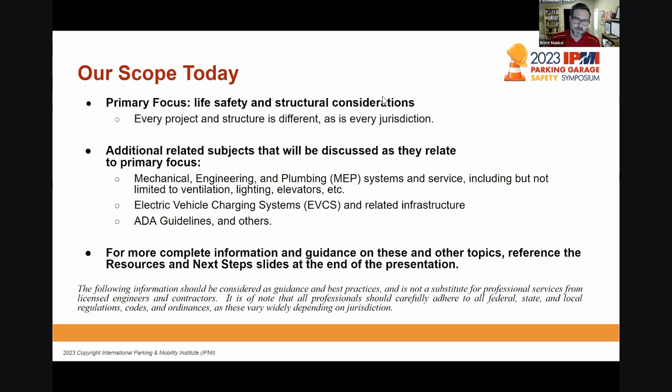So the scope, the initial focus, we're going to be looking at life safety and structural considerations. So obviously just looking at the design criteria. Then we're going to dive into a little bit about MEP, EVs, and how they relate to existing design, new design, ADA guidelines, etc. And we do have an appendix that will be shared. So the resources, you don't need to take great notes, because we're going to share what we have here, as well as

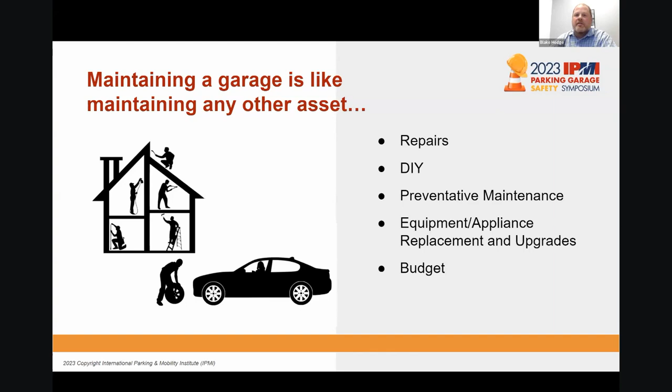And then finally, there's some things that you want to do. And so certainly in your home and in your car, there's some things that you want to do to maintain it, keep it going. And in that same vein, as you begin to think of parking as an asset, it's good to think about what you have to do, what you should do, and what you want to do. So if you keep those 3 questions in your mind as we go through the presentation, I think it'll be helpful and sort of layer in a flavor of understanding of the topics we're trying to convey.

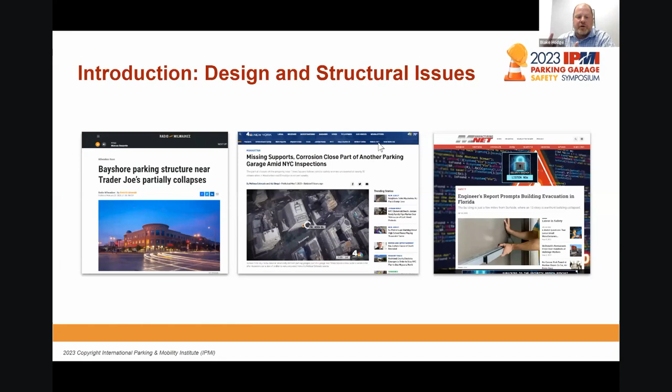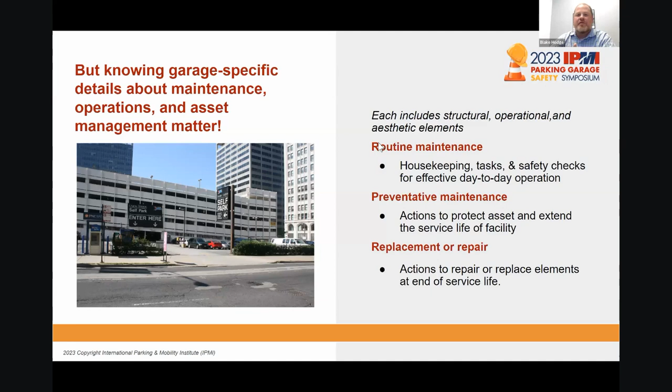And so with that, maybe next slide, Rachel. So we talked about things that you have to do, things that you should do, and things that you want to do. And we all know that there's some environmental factors associated with those, things from the elements, things of where you are, but there's also factors outside the environment. There's drivers, there's people that do damage to our facilities, and we need to understand and plan for those as well.

So when we begin to talk about how do we plan for these items, both the unknown and the known that we can plan for, just an idea of having one, budget set aside for these items, and two, a consultant, either through an on-call or a go-to consultant that you can interact with to address these issues. So with that, I'm going to turn it over to my partner to get in a little bit more details on the fundamentals of the design of the facilities we're talking about.

Sure, thanks, Blake. No, I love some of those photos. You never know. The structure is easy to deal with compared to the human factor.

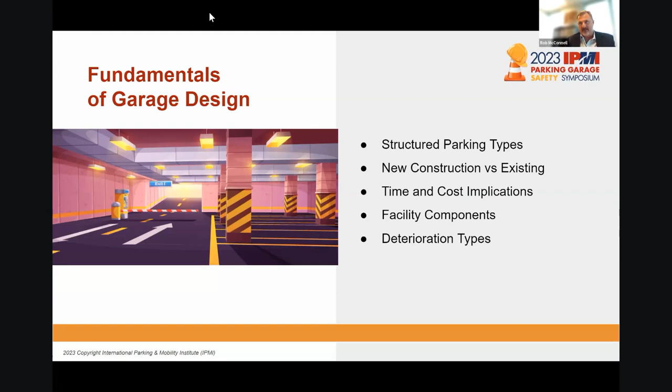I'm going to review a few topics here, and at least at the outset here, I'm going to try to digest all of structural engineering, durability design, maintenance, and everything, and distill it down into about 7 slides here. So bear with me as I run through these and understand there's a lot more depth to this. But starting off, if you want to roll it one forward.

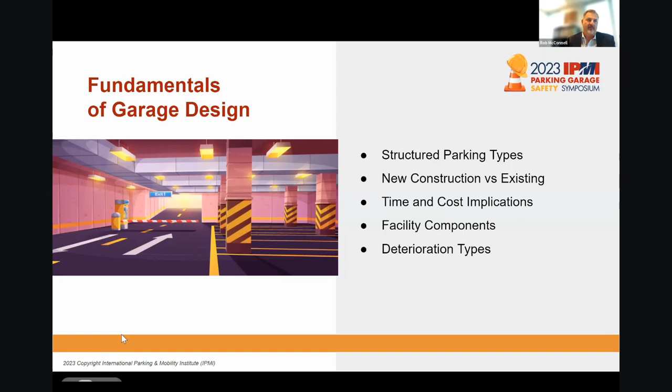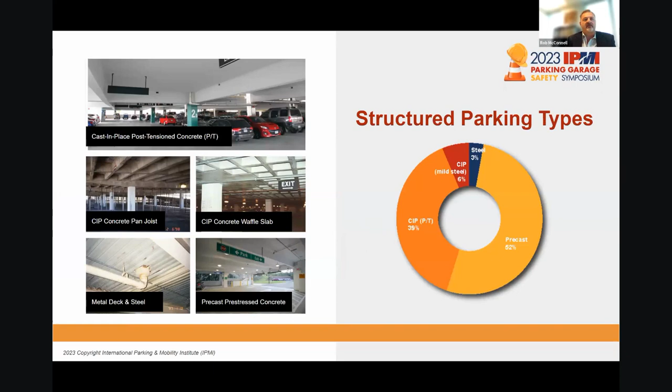I'm going to talk briefly about the different types of structures here. Got a few images on the left there of different types of structures. The top one is a cast-in-place post-tension concrete facility, and directly below it, you've got a couple different variations on conventionally reinforced, in other words, non-pre-stressed structures that are concrete, precast, pre-stressed, which is probably your most common type of structures, the bottom right corner. And then occasionally you see steel, either with or without metal deck. A lot of times in the Pacific Northwest, you'll see more steel structures perhaps than you will elsewhere.

And each one of these structures, number one, there's concrete in all of them because concrete is typically the driving surface. I can't think if I've ever seen a structure that didn't have a concrete floor in it. So you have to deal with concrete and all its strengths and its weaknesses. And each type of structure has its pros and cons. Dealing with each, you're going to have to address each a little differently.

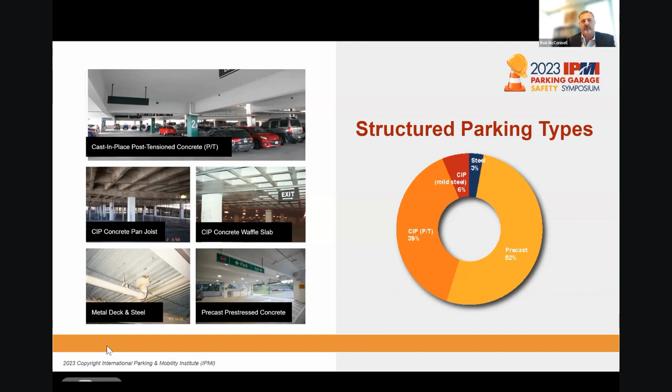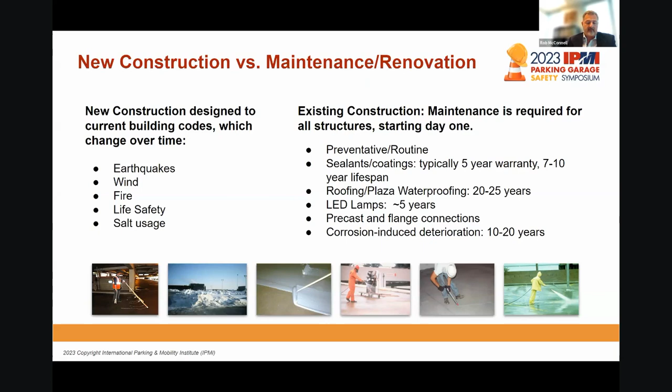And just as I mentioned previously, precast is probably the most prevalent, but by far and away, precast and cast-in-place post-tension make up the vast majority of structures out there. So understand what kind of structure you have. That's the first step. Second thing to consider is new construction versus existing construction and the maintenance associated with that. Typically speaking, new construction is going to be designed using the latest design techniques and the latest building codes.

Codes change over time, and structural design to a certain extent becomes obsolete. Although buildings don't fall down after the codes change, generally speaking. But for example, earthquakes: before the early 1990s, outside of the West Coast, very few places in the United States designed for earthquake loads. The wind codes just changed recently, and now they're more strenuous.

Fire: those of you who have new structures or are planning new structures may be aware that in the 2021 version of the International Building Code, there's now a requirement that any structure over 48,000 square feet have fire sprinkling, regardless of whether it's open or not, and that's coming out of a couple pretty nasty fires in Europe. Life safety requirements change. Salt usage in the early 70s ramped up to something like 10 times what it had been in the 1950s. So things change.

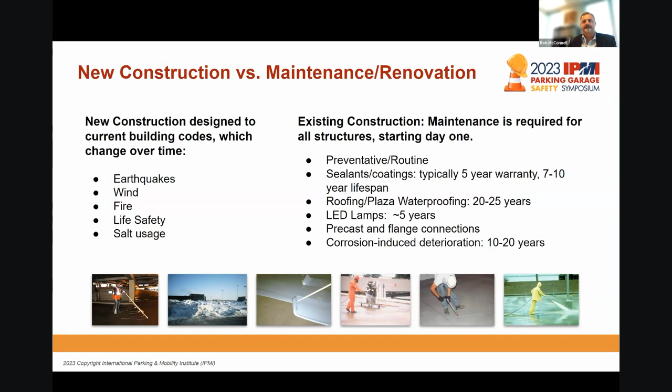But this type of exposure to salts in particular and moisture in particular is not just limited to the upper Midwest and the Northeast and the mountain states. On the coasts, you have airborne salts coming off the water, and the corrosion zone, the durability zone that ACI suggests for structures within about a half a mile of the water is the same as it does for the upper Midwest and the northeastern United States. Just that volume of salt.

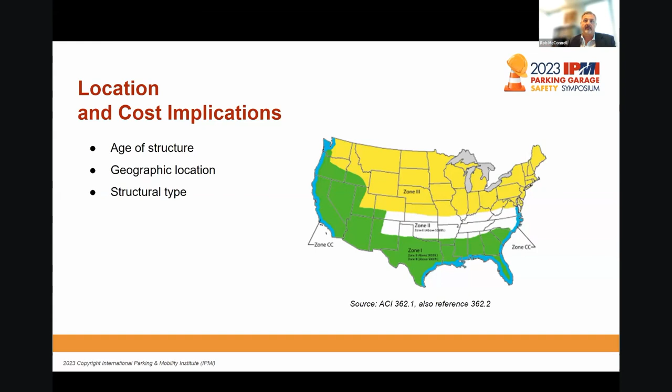So your maintenance and requirements and whatnot are going to be dependent not only on where you are and how much salt usage, but what type of system you have, whether the concrete is pre-stressed or not. In other words, pre-compressed, which will help limit cracking. Conventionally reinforced concrete is going to crack just as a part of its performance. And I showed you a picture of a metal pan system, stay-in-place metal deck. Those are notorious for trapping moisture between the bottom of the concrete slab and the pan, and so that freezes and thaws and rusts, and that has all sorts of other problems as well.

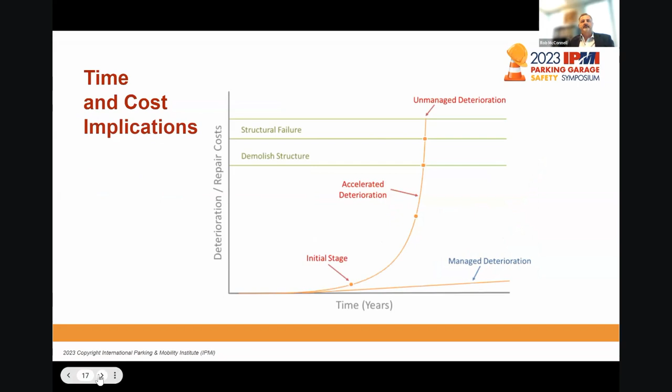This is a curve, and don't worry too much about what the units are. What it's intended to illustrate is that the longer you put off a repair, regardless of what that repair is, the more rapidly it's going to accelerate, and at some point it's going to get to a level where it's not manageable. And that is absolutely true for concrete deterioration. And then you've got the straight line along the bottom there that says, if you manage the deterioration, it's a process and a known quantity. If you stay on top of it, it doesn't get out of control.

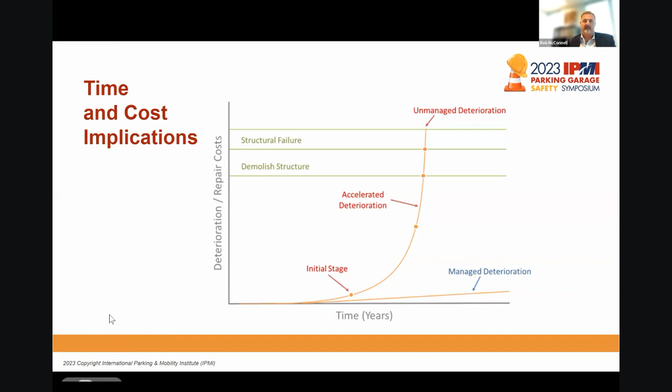Here's an example. Mark said it looks a little bit like snakes and ladders, but it hopefully is an effective graphic here. An example would be a leaking crack or a leaking joint. If you noticed in a garage that you had a leaking crack or a leaking joint, your inclination might be to say, well, that's just one spot, I'll catch that next time around, when we replace the sealants in a couple years. Well, to replace that sealant, it might cost you $5 a linear foot. If there's not much of it, it might even be as much as $10 a linear foot, but it's peanuts compared to what you're going to have to deal with if that joint continues to leak and lets salts and moisture into the crack and causes the embedded rebar to rust.

And when the rust expands, it causes delamination. We're going to talk a little bit and show you some pictures a little bit later about that. But to fix a delamination is going to run you somewhere in that $50 to $100 a square foot range. So you're talking orders of magnitude above that $5 linear foot repair. And then if you just let it go and you say, well, I'll catch that next time, it gets more and more expensive, and eventually you get to the point where portions of your garage or maybe the whole garage becomes unserviceable and unusable. And you lose not only the money it takes to fix that, at such time you decide to fix it, but also whatever sort of revenue you might be taking in for being able to use that part of the asset.

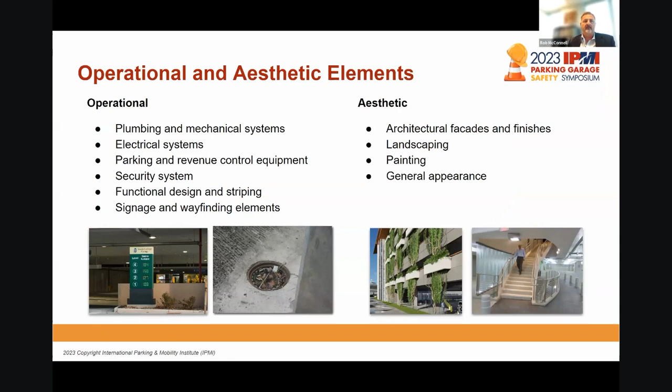And one more thing here, maintenance is not just about the structural piece of a parking structure project. All of the garage's systems need review and TLC over the course of the life of the garage. These include plumbing systems and electrical and lighting and the parking access and revenue and parking guidance systems and security systems and so on.

And then in addition to that, you want to keep up the aesthetic features of it. People need to be comfortable, need to feel safe and secure in a garage. And part of that is keeping your finishes up and keeping things clean and nice and well lit, and keeping the general appearance of the facility such that you're attracting customers.

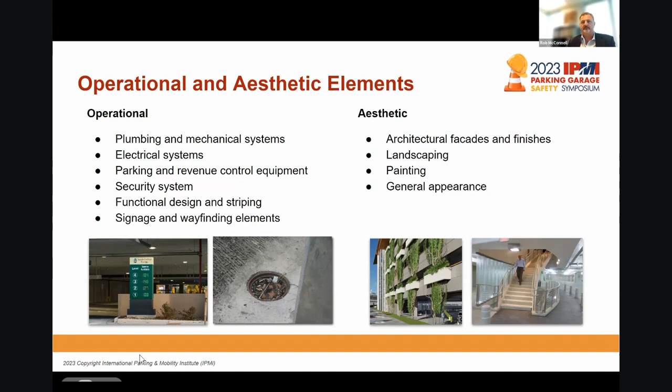I'm going to turn it over to Mark. Mark's going to talk a little bit about some other stuff here.

Great. Thanks, Rob. So in addition to some of the structural information Rob went over, along with those operational and aesthetic components, I want to do a bit of a deeper dive and talk about the overall facility components. As you can see there in the bullets, we're going to chat about functional design, signage and PARCS, stairs and elevators, and we'll dive into MEP towards the end of that particular program.

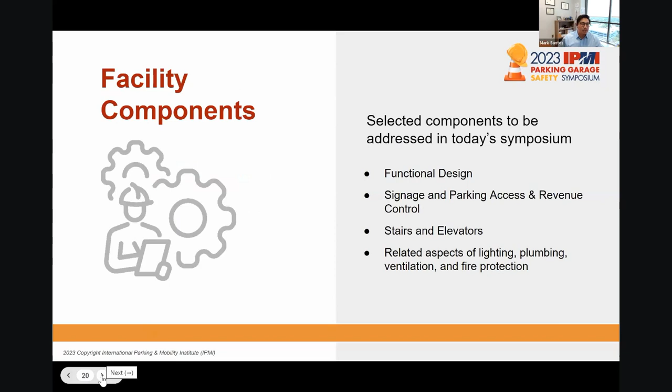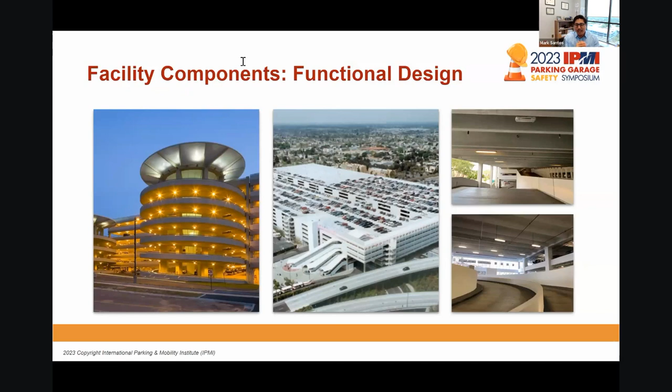So with functional design, I'm sure we have a lot of examples of good functional design and maybe others that need some improvement. But the whole idea with designing parking garages and facilities and mixed use types, the goal is to have efficient layouts, streamlined vehicular flow and, of course, comfortable maneuvers. And how we wrap that up as an industry is how we label that term as functional design.

Some key design aspects, as you can probably relate from your facilities: where are the entry exit locations? Is there one-way flow versus two-way? What are the types of users? Are they parking all day, or is there a lot of turnover and transactions? How are the ramps oriented? Are they in the right spot, and are there more than one?

So while those areas are pretty important to functional design, we also cannot forget about trying to minimize cross traffic within the facility, trying to minimize pedestrian conflicts with any types of vehicles, and also properly locating and placing stairs and elevators to where most folks are at their point of destination. Next slide, Rachel.

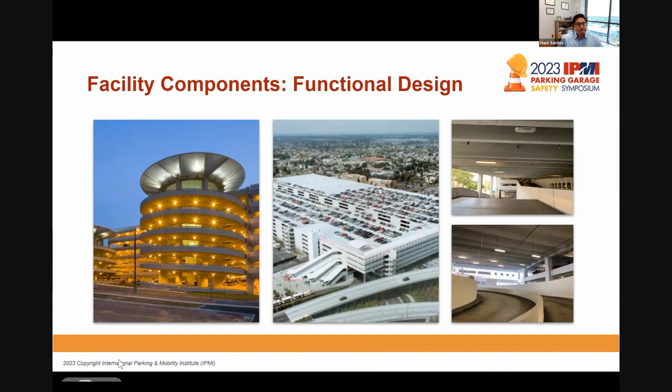Probably one of the most visible pieces for your patrons that they typically see upon arrival are your signage and any type of parking access and revenue control. So from a signage standpoint, sometimes there could be too much signage. So what is that balance between quantity and content?

As we talk about these areas with your facilities, how do they relate to what you see day in and day out? Are your signage messages clear and concise, or maybe there's too much information? Are they placed in the proper location to allow patrons to really understand what they need to know at the proper time? These are just a few examples you can see here when you analyze your own facilities.

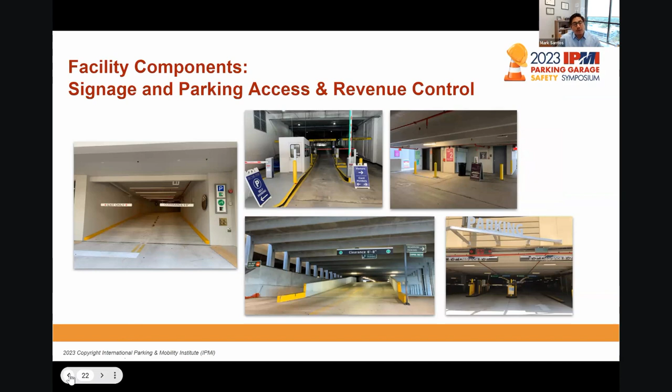From a parking equipment standpoint, many owners are interested in whether it's asset light or less equipment. But at the end of the day, most owners are looking for something to be more convenient for their patrons. Maybe it's the right time for upgrades, or maybe it's the right time to consider upgrades.

But what we typically talk about as well from our standpoint is, what are the viewpoints and the benefits from the user standpoint, of course, but also from the owner side, the operator side. Are there any advantages with enforcement or available data? Those kind of questions that come to mind.

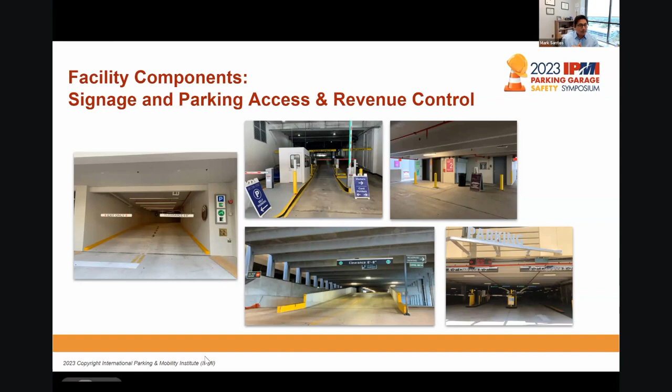The third piece is really talking about vertical circulation, or stairs and elevators. Obviously we're very familiar with what these are. They provide not only the vertical circulation between levels, but they are a part of your life safety system for egress. In the event of an emergency, your stairs are part of that life safety component, whether it's your guardrails providing fall protection for your patrons,

or minimizing the conflicts between vehicles and pedestrians. Again, you can see a lot of the bollards in these particular photos providing that level of protection.

A few other things to consider with your stairs and elevators: there's typically maybe one or two that are more prominently used than others. And sometimes it could be easy to forget about some of those egress stairs that are really only going to be used for emergency type conditions, and we definitely want to make sure that patrons are safe, minimizing any tripping hazards, things of that nature, to ensure full safe components, not just in the parking areas, but also in the stairs and elevators.

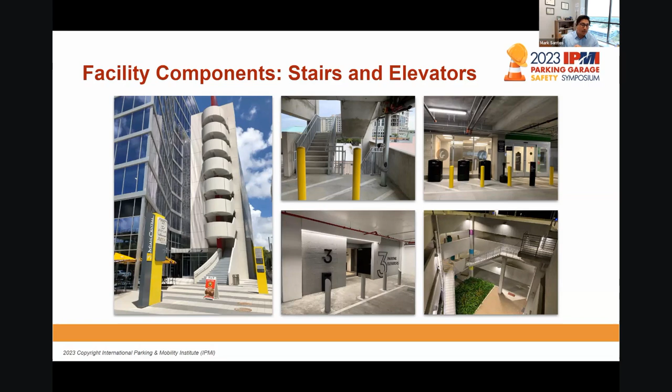And lastly here is more of a helping with the overall performance of the parking structure itself. We could spend a lot of time talking about MEP, and I know we're gonna have a little discussion. I think we're getting some questions about what are the impacts of EV and those loads, and we'll kind of chat about that towards the end, because I know that's definitely on folks' minds.

But as far as your typical MEP or mechanical, electrical, and plumbing systems, obviously your lighting systems are super important to provide a safe and secure environment. Are there areas of your parking garage that are painted, as you can see in some of the examples, to help provide some more increased visibility and increased lighting levels?

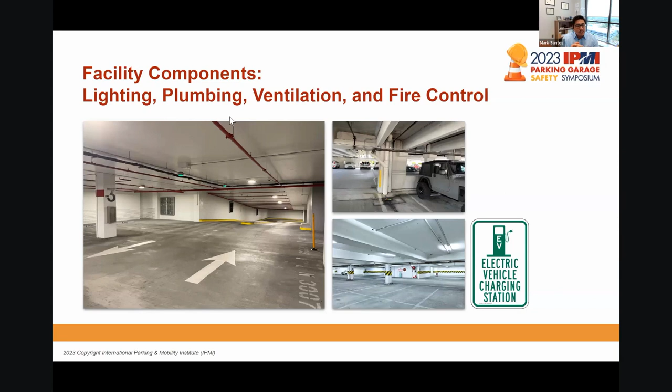The picture at the top right, while it's kind of out of sight, out of mind, and I'm talking about the plumbing and drainage system, unless there's an issue. So making sure that your drainage system is clean, so there is not ponding water and things that could then lead to leaks in other locations. As Blake and Rob tried to mention, it's really trying to stay ahead for the most part of some of these systems.

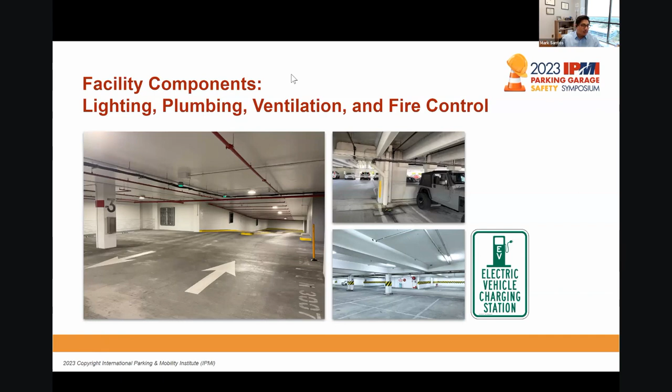And then also fire suppression, as Rob mentioned, that's definitely something that I think a lot of us are in tune with, but as the codes change, it's going to be more prominent in having sprinkler systems, and what does that really mean, not just from a cost standpoint, but from a maintenance standpoint as well. So that kind of wraps up more of the support systems. I'll turn it back over to Rob to a little deeper dive on specifics of maintenance and restoration.

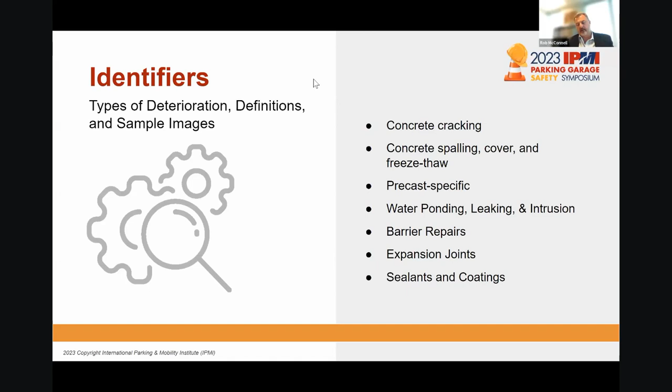Sure. So what I want to do is run through some pretty typical types of deterioration that you might see in a parking facility. And granted, some of these pictures are a little bit on the more extreme end, but they are characteristic of what you might see. That way, as you're walking through a garage and doing your in-house review, you could train your staff to kind of keep these things in mind.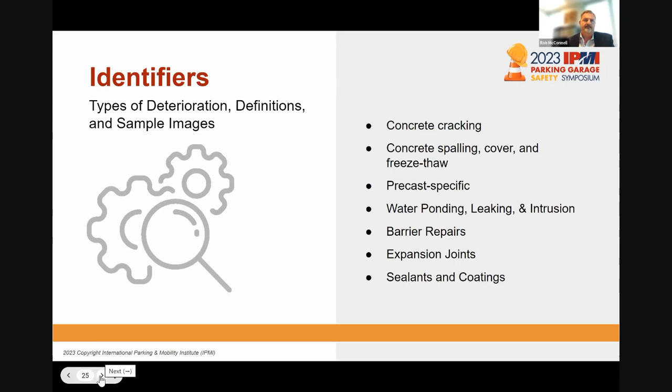And if you see something that looks problematic, maybe you can relate it to some of these images, and I'll also try to give a sense of at what point these indicate a really significant problem versus maybe a serviceability problem or an aesthetic problem. So the first is concrete cracking. All concrete cracks. That's part of the way it's designed. Some cracking is worse than others.

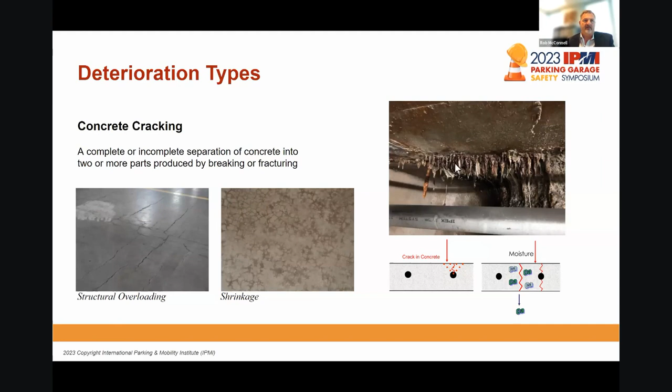The image on the left there is actually cracks due to overloading. In this particular facility, they were driving loaded forklifts in the garage, and it literally broke the floor. So we had to strengthen the floor to address those, and then deal with the waterproofing aspect of the cracks.

The image in the middle is typical of what you might see for plastic shrinkage cracking or possibly drying shrinkage cracking. That's usually indicative of, during the curing process for the concrete, the moisture in the very top of the slab evaporating too quickly, and the very top layer of the concrete drying out and cracking before the rest of the slab is cured out.

Compared to the structural cracks on the left, the shrinkage cracks are very shallow, and typically they're not structural, although they do need to be addressed because over time it can lead to deterioration of the top surface. The image on the right there, that's kind of the extreme condition of leaking cracks. Those cracks have been leaking for decades and nobody's done anything about them, and you can see stalactites forming.

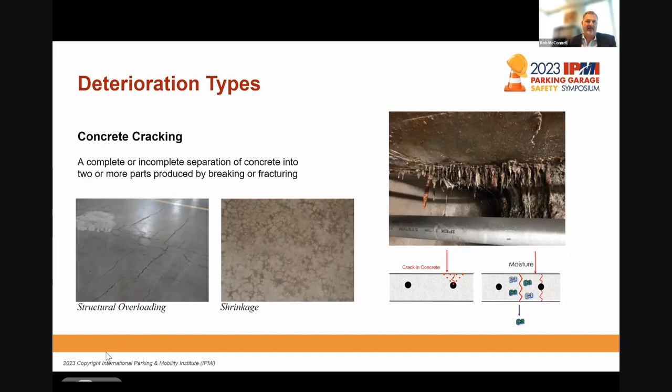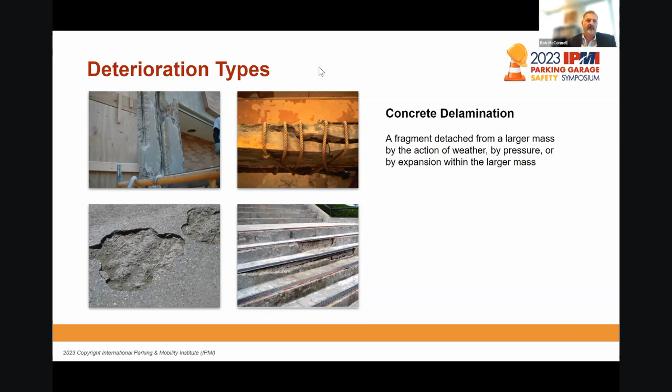So when you get leaking cracks and moisture in concrete, you get corrosion, and the corrosion product is rust, and rust has significantly more volume than the steel itself. So when the rust forms, it creates an outward pressure on the concrete, and concrete's great in compression. It's not good in tension. It can take about 10% of the stress in tension that it can in compression. So when you get that outward pressure, it pops the concrete off.

And in every one of these images, with the exception of the famous rope repair up there in the top right, you can see exposed rebar that is rusted and caused that concrete to spall off. Spalling is another word for concrete delamination. The rope repair is an extreme example of somebody deferring maintenance, not wanting to spend the money to actually repair something in the proper fashion.

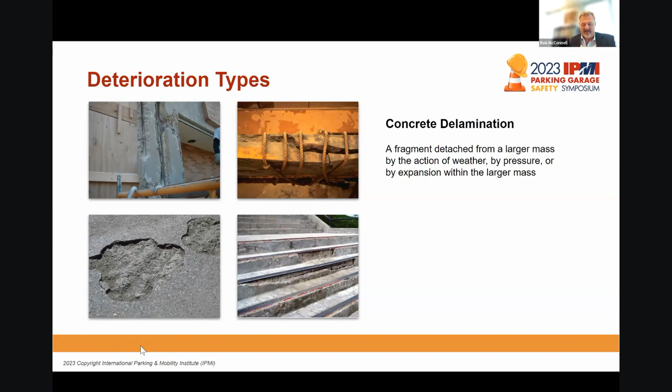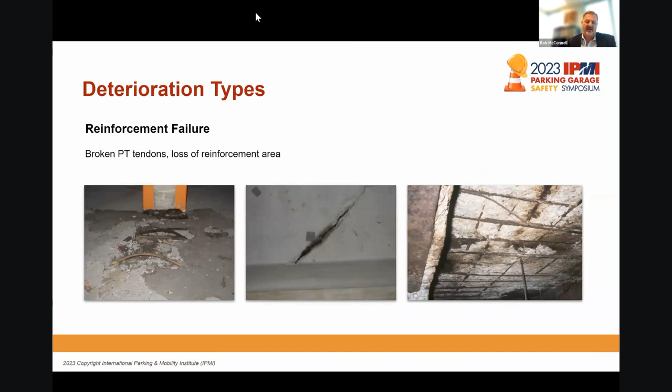The next slide: when steel rusts, not only does it cause the concrete to delaminate, it also causes you to lose the steel itself. The cross section of the steel gets reduced every time you generate more rust, and sooner or later you lose the ability of that steel to support anything. Or in the case of post-tensioning tendons, like you see in the image on the left, you start losing.

These are 7-wire strands. Typically, you lose a wire. Maybe it doesn't do anything. You lose another wire, and all of a sudden, the remaining 5 or 4 wires don't have the capacity to hold that pre-stressing load, and they break and explode up out of the slab. And that's what you're seeing, the multiple broken tendons there from corrosion somewhere out away from this point, where enough of the wires in the strand rusted to where the rest of the tendon couldn't support them,

and it caused a failure there. The image in the middle, what looks like grease coming out of a crack, that's exactly what it is. It's grease from a post-tensioning tendon that has failed and ruptured. The post-tensioning tendons typically have sheathing around them. Some of the older ones are paper wrapped, and some of the really old ones don't have anything.

But most of the tendons that have been put in the last 30-35 years have a polypropylene sheathing on it, and it's got a grease in that sheathing to keep the moisture out. And if something happens to the sheathing, it gets compromised. If the tendon fails somehow and ruptures the sheathing, then you can get leaking grease, and that's an indication that you've got a structural problem.

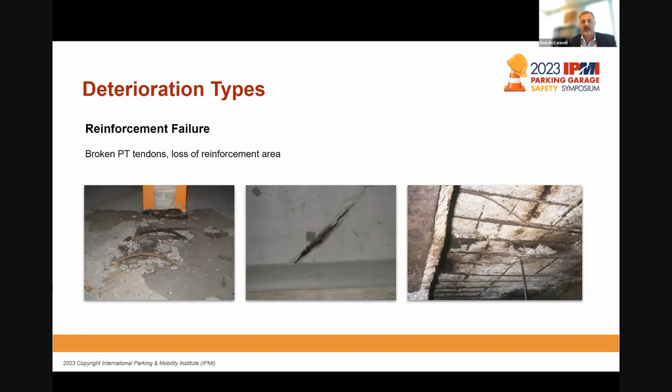Another type of deterioration that you see, particularly in the northern climes where you get lots of freeze-thaw cycles, is scaling. What causes this is moisture gets down into the top layer of the concrete, and if you remember your elementary school science experiments, when water freezes, it expands. And if the concrete doesn't have air bubbles in it, air entrainment, or if when they finished the concrete they really brought the paste up and overworked the top layer, it probably took all the air out of it.

And so when that moisture goes down into the concrete, because it will penetrate concrete, it's got a bunch of capillaries in it, it's like a hard sponge. When that moisture gets down in there and freezes, it doesn't have anywhere to go. There's no air bubbles for it to go into. And so it's similar to what happens when the steel rusts: it puts this outward pressure and just breaks the top level of the concrete off.

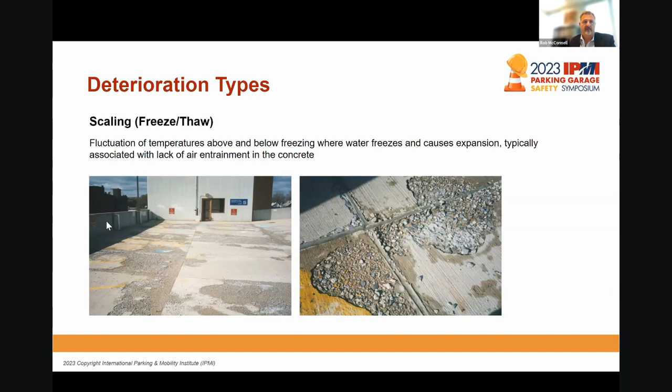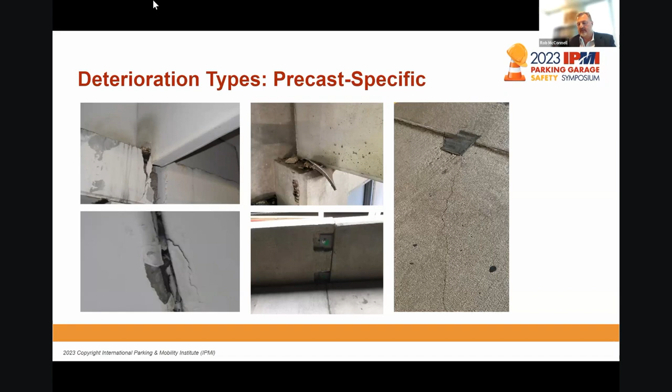That bearing pad has walked off the ledge, probably due to the cyclical nature of the volume change. Garages are pretty dynamic animals. They expand when it gets hot and they shrink when it gets cold, and they're always moving. Most of them expand and contract somewhere in the order of about an inch or so each way a year. So as that happens, things move. Also, precast structures tend to be a little bouncy, and as the cars drive over it, that movement can cause those bearing pads to walk out.

The image on the right and the image on the bottom left are somewhat related. Those are double T flange connections, and different types of failures associated with that. Again, caused by movement, up and down movement, volume change movement, and water and rusting over time, and they will break and sometimes cause the concrete around it to crack and spall. The pre-topped decks, the decks that have factory installed topping versus field cast-in-place concrete topping, tend to be more vulnerable to this than others.

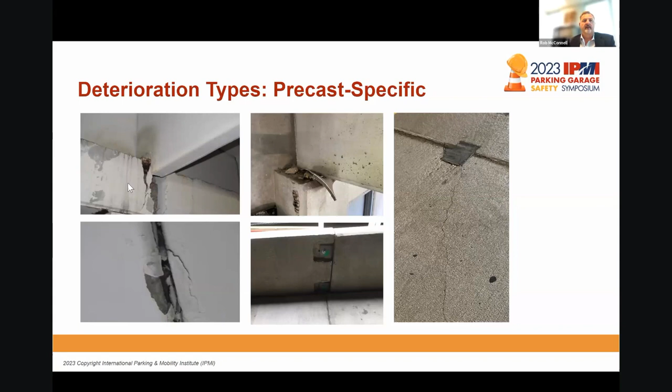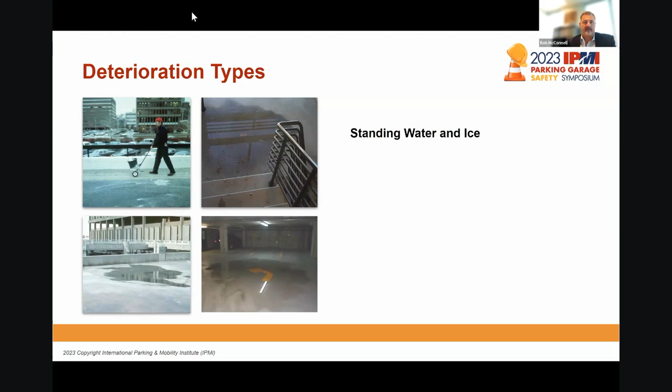This water is going to migrate through the concrete. It might freeze if you're in an environment subject to freezing. That will accelerate scaling. It will accelerate intrusion of chlorides. You got this gentleman up here in the top left who's putting salt out on the deck. Somebody had a question earlier about use of non-chloride ice melters versus chloride ice melters. Obviously, it's beneficial to use non-chloride ice melters, but they tend to be more expensive than good old rock salt. So a lot of people use the old school type of ice melt, and of course that just dumps more chloride on the deck and accelerates corrosion.

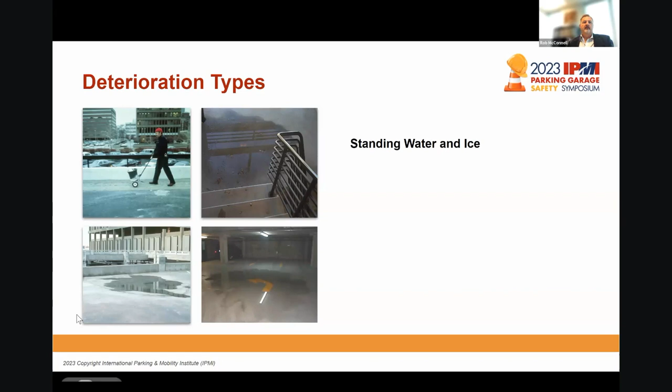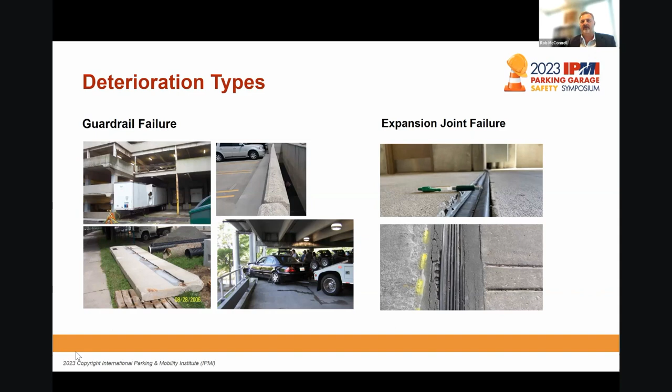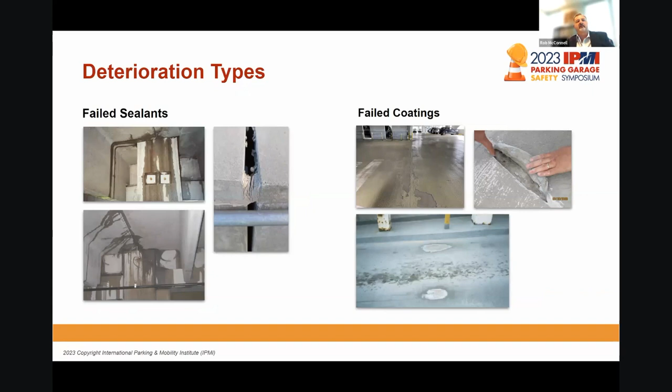Lastly, we got some examples of failed joint sealants and failed coatings. The images on the left are primarily precast, but that doesn't mean that cast-in-place post-tensioned concrete is exempt from that as well. And then on the right, you've got a few different examples. You've got coatings that have failed in adhesion to the surface. In other words, the adhesive nature of the coating has disappeared and it's pulling away. And the bottom image there, you actually have wear in areas of high traffic, and those are different types of failures that you can have in coatings.

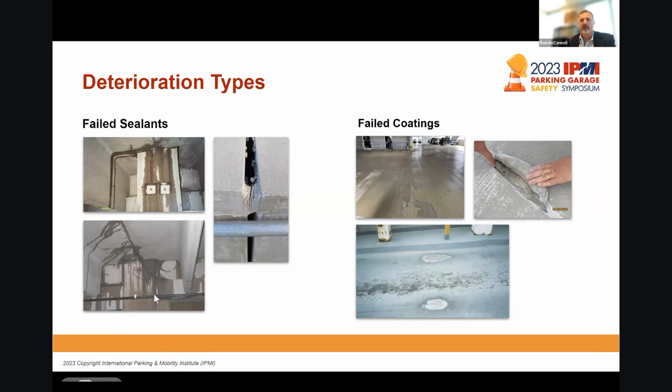So we have some moderated Q&A, and Rob did key in on one thing. Personally, I'm not an engineer, I'm not technical, but I tend to think of parking structures as big monolithic structures, but they're living and breathing, they're moving.

And with that movement, there's deterioration in ways that you might not anticipate. So looking at it under that context provides a really good perspective, I think. I'll jump into the questions and answer as I can and open it up to the group.

So Jefferson Inman asked, how do you inspire parking contractors for a city to be proactive with their security measures? I would also like to point out there are a few topics that will be coming up a little further on in the presentation. But with respect to encouraging proactivity, make sure they know what they're looking for. So Rob gave some great examples of what these warning signs look like, and think of it, this is your patient, and what are the first indications of a fever, and what are areas to watch for, and make sure that you're recording it and tracking it and providing a path forward.

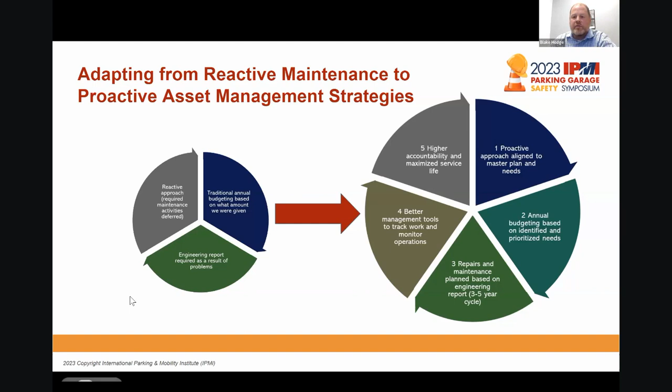And if you think back to the curve that Rob showed, instead of this exponential curve of problems causing deterioration that causes issues, and that happens quickly, if you have this cycle, you can flatten that curve and you really maintain the value of your asset. And that's what we're trying to do. So again, there will always be a need for immediate responses. And our goal is to have those be primarily assigned to things outside of your control. But then there are things that we can program for, we can budget for, and just realize your garage is a building, and a building needs maintenance, and it needs improvement. And that allows you to plan to ultimately get to the things that you want to.

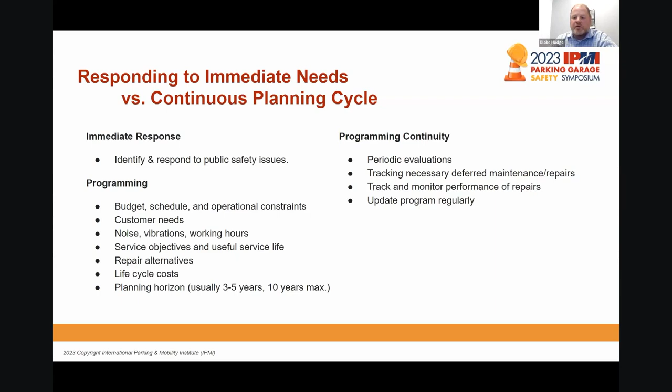Mark, I think you're going to talk about some more of the planning associated with this asset management idea. Yep. I'm going to do a little bit of a deeper dive. The next two slides are really taking a step back and thinking more about planning and how we can get to achieving our goals. With all of the things that Blake and Rob had described, specifically with identifiers, what does that all mean, and how do we get to a point where we make sure that internally we're all on the same page, we have our leadership on the same page, we have the funding in place. Those are the few highlights I want to hit on the next few slides.

But here, a couple quick points. It's pretty important to have good record keeping, especially for those facilities that have had previous repairs. The past performance has a direct impact on the next steps and the path forward. Has there been regular maintenance completed, resulting in that manageable approach as in one of the graphs that Rob showed earlier? Or should your department be aware that there's a significant increase in budget to tackle maintenance and repairs that could have been manageable, but now are above that particular level of repair?

Also, maintaining those records provides a basis for technical assessments and a history of budgets. As your facilities continue to get assessed, it really provides a roadmap for how your garage has been performing, and whether there are areas that continue to need to be addressed, or things are being maintained within a certain area.

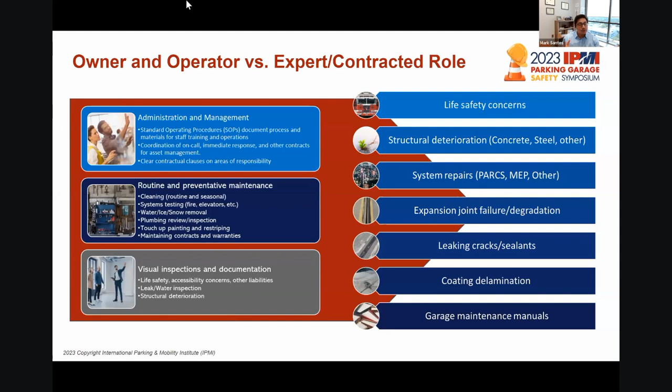What this graphic is trying to explain, briefly here, is the expected roles and responsibilities between an owner and an operator versus a technical expert or someone that's contracted. So briefly on the left, those three areas are what we would typically allocate to an owner and operator: the administration and management pieces with regards to standard operating procedures for the staff that are actually walking through those facilities each and every day. Is it clear what their position and their tasks are?

Do you have an on-call group of folks you can call to look at items, whether that's an assessment or an immediate response, with some of the images that Rob showed as well? Of course, owners and operators are responsible for routine and preventative maintenance, which we've talked about. What I do want to hit on is that gray box on the bottom: empowering staff, especially those frontline employees that are out there walking the garages, driving around in golf carts and seeing things. It's better to ask and determine whether something needs to be looked into further, rather than kicking the can down the road

or ignoring something that may show a sign of potential need. And when that happens, all the things on the right are what a technical expert would look at. They would define the types of repairs that need to happen, but also what the next steps are. We understand not everything may need to be repaired at once, but you can see there is an organization and priority, putting life safety concerns at the top along with structural deterioration, as obviously those are paramount with assessments and maintenance as it relates to restoration.

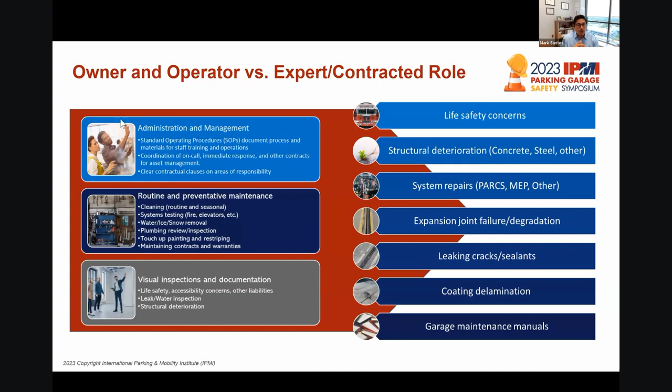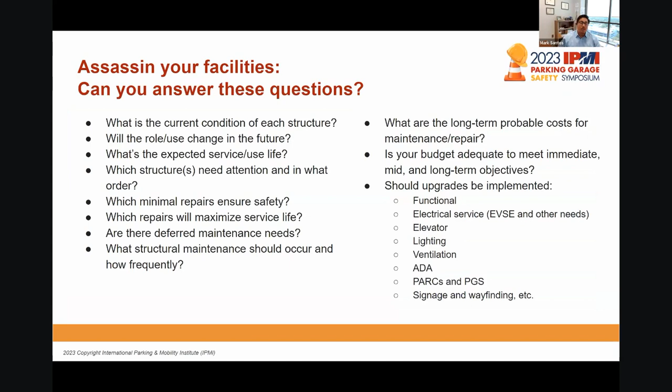On the next slide, obviously I'm not going to read all the questions here, but the intent here is how well do you know your facilities? As you look at some of these questions, are you able to provide a type of response about the current condition? How much longer are you trying to have that facility fulfill its useful life? What repairs need to happen and in what order? So while you may or may not know some of these,

And I'm sorry, Rachel, I'm looking at that title. That should say assessing your facilities. But thanks, Hal. Okay. I'll own that, Hal. Thank you. I'll take you with it, Rachel. I'm not going to let you. That's one of the ones that spell checker doesn't get, Mark. But I'm looking at it, I'm like, wait a minute. Thanks, Hal. So that was a little bit of a curveball.

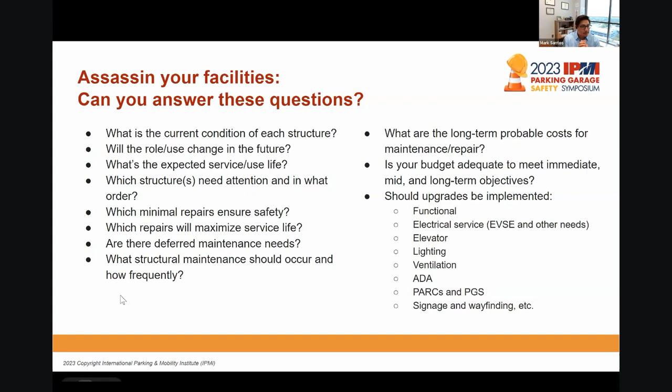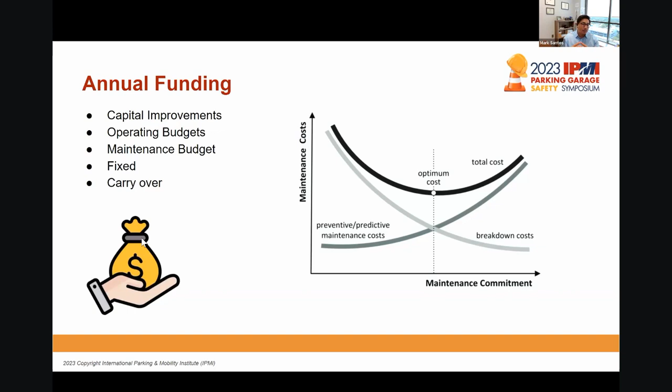And then once you're able to, get your place in line for the annual funding. I know different organizations, it might be I'm able to carry over funding, or it might be a use it or lose it type annual funding, or it could be a fixed budget. Here's a fixed amount of dollars you can have every year. How do I best spend this money to repair the facility and what's priority? And all that comes as part of the asset management plan. So I think we're going to turn over now to more of an operations piece with Brett.

Thanks, Mark. Yeah, so we've had a great overview of a lot of the specifics that we're looking for, strategic planning, budgeting, et cetera. But the daily users, the operations folks who are on the ground, they're the ones who we really need to elevate and educate and lean into hard. And so operationally, number one, it's identify the areas to look at. What specific aspects of some of the slides that Rob shared should you be looking at? And it's going to be specific to the garage.

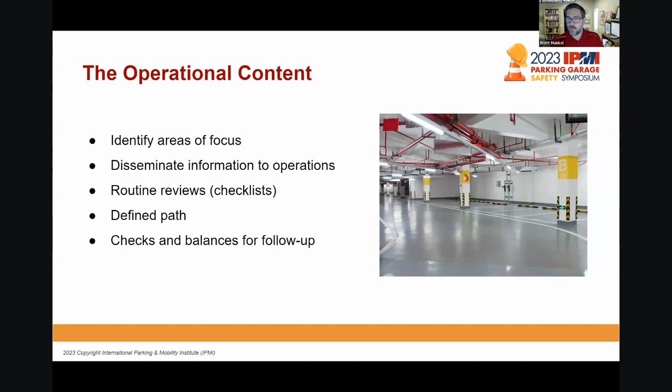Engaging with one of these folks here or someone within the industry to help you dial into the specifics of your facility will help to identify what to look at, what to look for specifically. But then you have that report, you have the information, it needs to be disseminated. It needs to be explained to the people who are on the ground on a daily basis, who are walking around the facilities and could identify these things. And then give them checklists, give them ways to make that a part of their routine as a critical path. And once that's known, they need to know what to do with that information.

So if you see a stalactite beginning to form, or there's a crack here where it wasn't, or maybe it's a larger crack than it was in previous years, what do they do with that information? So it's great to share the information, know how to recognize it, but then give them a path forward, and then check up on it. Any system needs to be checked up on, and the goal here is to provide a practical means for your operational folks to identify and report, and then you to react to areas that are found.

Next. And so we're going to jump into some best practices, kind of summarize what we've run through. But number one, and the word I heard over and over again is proactive. If you're reactive, you're too late as it relates to maintenance. You want to be proactive. Look at what's out there. Help define standard operating procedures, and you need to actually do what those best practices are.

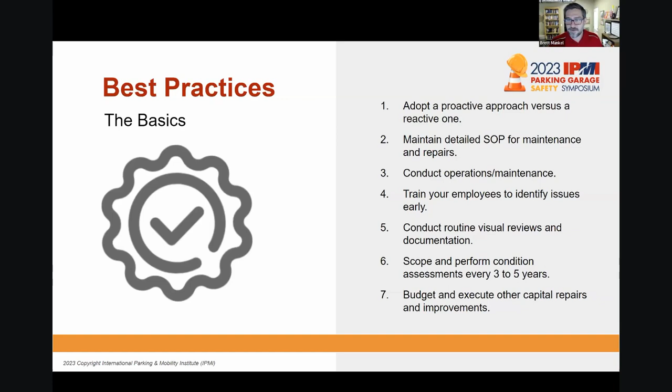And there's lots of commentary going around regarding budgeting. It's a critical thing, and it's very, very easy to ignore during the early years, or if everything looks okay. But that's a piggy bank that you're saving for the future. And so these are the best practices. You could turn it up a level, and we're going to go to the next slide for the ones you get extra credit on.

So consistently funding your capital reserve, and doing that on a routine basis, knowing what you're planning for, and doing it year over year over year, and not touching that. It's very easy, or tempting rather, to look at that pool of money and dip into it when you don't need it. But there will come a time and a place where it's needed. And so maintaining that pool of funds is very important.

Also, a pool of consultants. Know who to call before you need to call them. And if there's consultants you like working with that are experts in specific areas, make sure that they know you and you know them. And then you have a maintenance manual. Are you really adhering to it? So often things just get stuck on the shelf and they stay there. But take it down, look through it, make sure that you're being proactive in application of what's recommended.

And then that document needs to be a living and breathing thing. It's not something that should sit on the shelf. It should be updated as new equipment comes into play, as codes are updated. It's something to be routinely reviewed, even just on an annual basis, and updated as needed.

With that, we're going to stick around for some more Q&A, and we're here for a while longer. I know we have a few other questions that have come in, and I'll try to read through them. Let's see. Can the panel discuss the importance of concrete cover over top steel in cast-in-place placement for garage durability? And that's a question that is firmly to the panel. I couldn't field that one real easily.